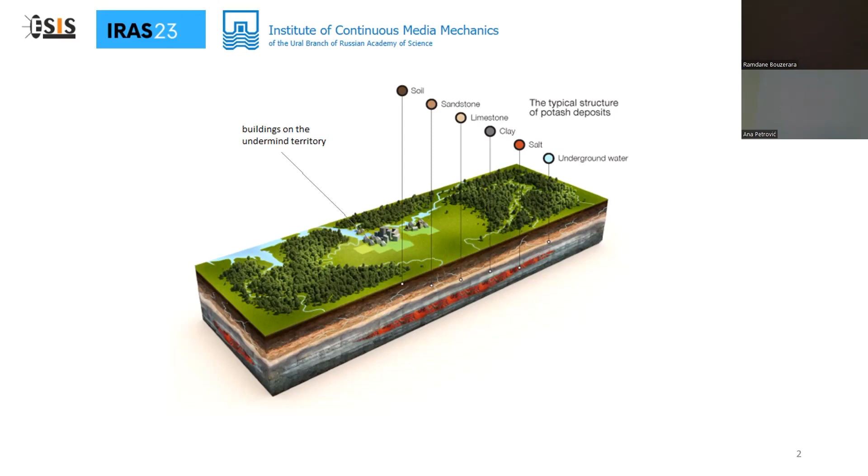The methods of estimation of the stress-strain state of the system building–foundation–soil, which are given in the normative literature, establish some rules for design and operation. They allow taking into account the existing technogenic processes in the soil mass or require special structural reinforcement measures in case the controlled deformation characteristics of the building exceed the limit values.

However, quite often it turns out that the existing building has been designed without taking this factor into account. And the changed state of the environment makes it necessary to evaluate the possibility of its operation on the basis of deformation processes accumulated by now in the whole system.

This work was motivated by the need to assess the operability of a large array of residential buildings and other construction sites located in the town of Berezniki, which is located on the territory of the Verkhnekamskoye potassium salt deposit. The slide shows the Verkhnekamskoye potassium salt deposit in the Perm region of the Russian Federation, as well as a plan of developing the seams beneath the city of Berezniki.

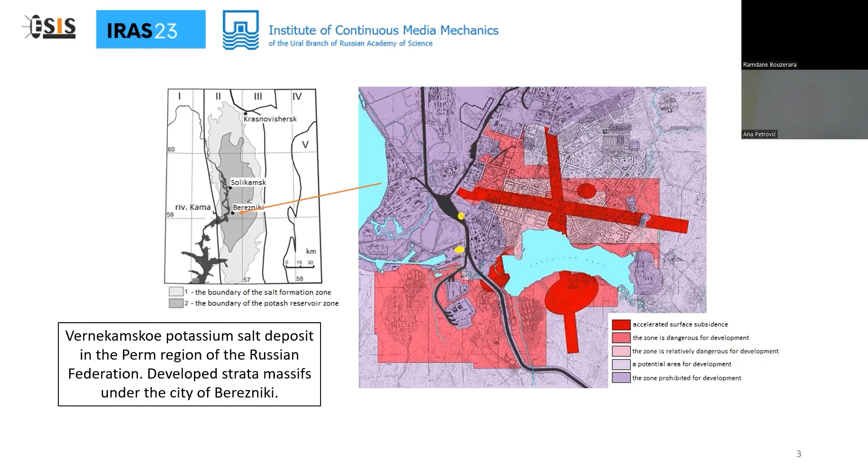Over a long period of time, certain sections of the city territory have experienced significant vertical displacements. As of 2022, the vertical displacement of some parts of the urban development was about 1.3 meters. In 2007 and 2018, several ground failures were registered in the urban development area.

It can be seen that the maximum values are confined to the failure zones and the maximum strain gradient is observed exactly there. However, it's worth noting that the zones with a large strain gradient are areas where the population has been evacuated and buildings have been resettled.

Areas of urban development where the intensity of strains is lower and reaches a value of 3 millimeters per meter on average are exploited. Therefore, it's very important to closely monitor the condition of structures and be able to predict their deformation behavior. That's what this study is devoted to.

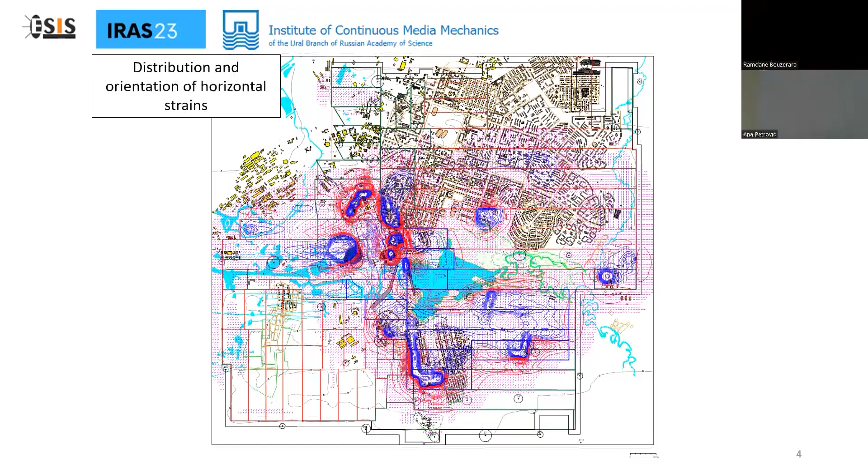Based on experience of observing the state of the urban building massif for more than 15 years, we can say that one of the most negative types of deformed state for a building structure is stretching along the long axis of the building. This deformed state is not designed for. Structures are not able to absorb and compensate considerable forces that occur in structures when such a deformed state is realized in the vicinity of their foundations.

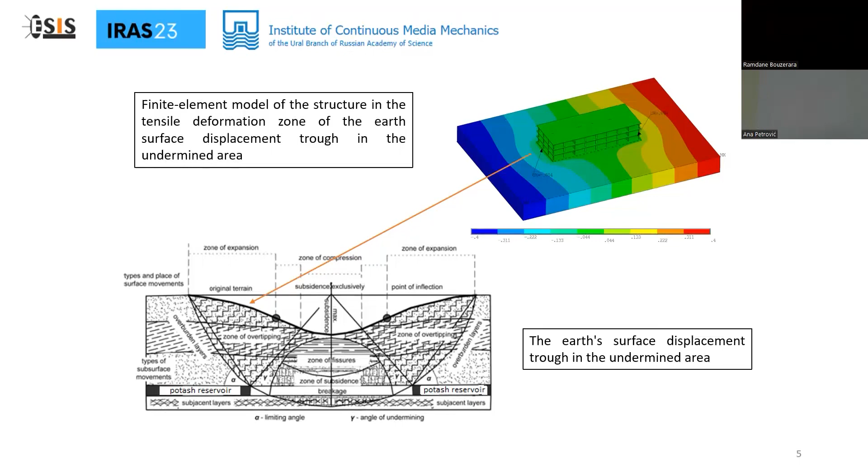The slide shows a diagram of such a deformed state for a structure. This type of deformation is characteristic of structures that are located in the tensile zone of the soil massif in the mining area. Using the finite element method, a series of computational experiments were carried out, and a large number of boundary value problems were solved to simulate the deformation behavior of the building–foundation–soil system.

Structures of various storeys standing on foundations of various types were simulated. The stress-strain state of the building structures, depending on the amount of deformation of soil mass in the vicinity of their foundation, which simulated the effect of mining, was assessed. The slide shows typical boundary conditions for the problems to be solved.

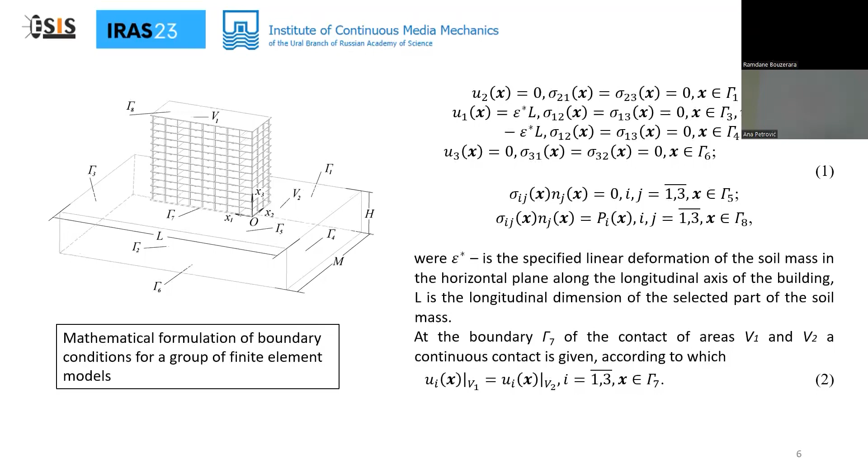The analysis of numerical experiments made it possible to obtain the dependencies of the stress-strain state of the load-bearing elements of structures on the deformations of the surface layer of soil in the vicinity of the foundation. Relevant in solving these problems is that the deformed state of the load-bearing elements was modeled as a process of transition from the normal stage of the structure to the subcritical and critical stage. These solutions were made in a nonlinear formulation, taking into account the stage of application of boundary conditions. The Willam-Warnke model was used as a model of concrete behavior.

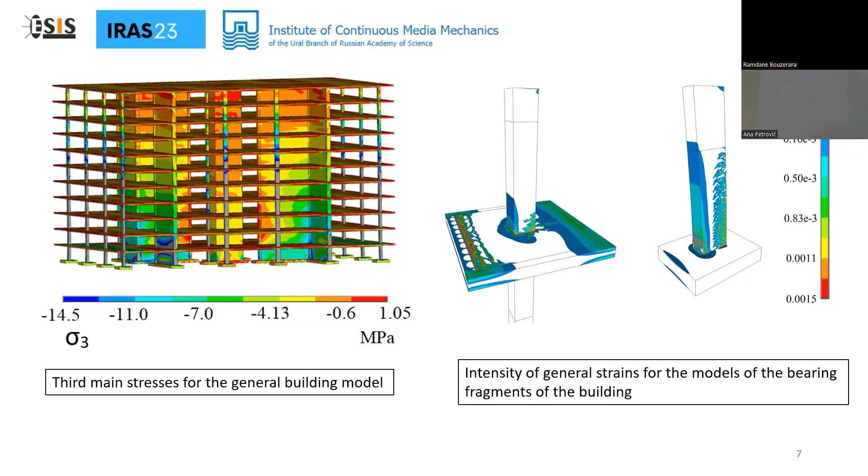The slide shows the distribution of the third principal stresses in the frame elements of one of the structures. The soil is not shown. It's also possible to see a picture of intensity of total strains for one of the stages of deformation of load-bearing assemblies at the stage that precedes the destruction and loss of load-bearing capacity.

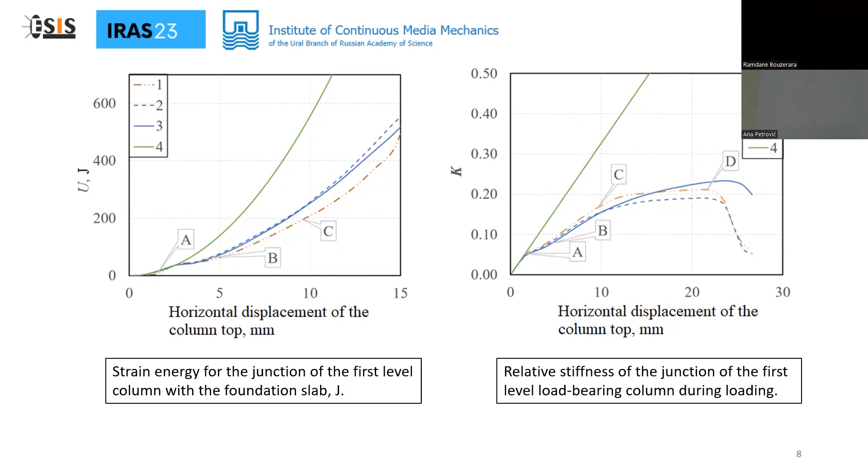We can see that as we take into account the nonlinear components of the strain interaction with the ground at the foundation of the building, the amount of deformation of the ground mass which the building is able to absorb without significant losses increases. Values of 7 mm per meter no longer seem to be critical and even allow you to continue to exploit the structure in special cases. The normative document, however, forbids operation with values higher than 1 millimeter per meter of the length of the building.